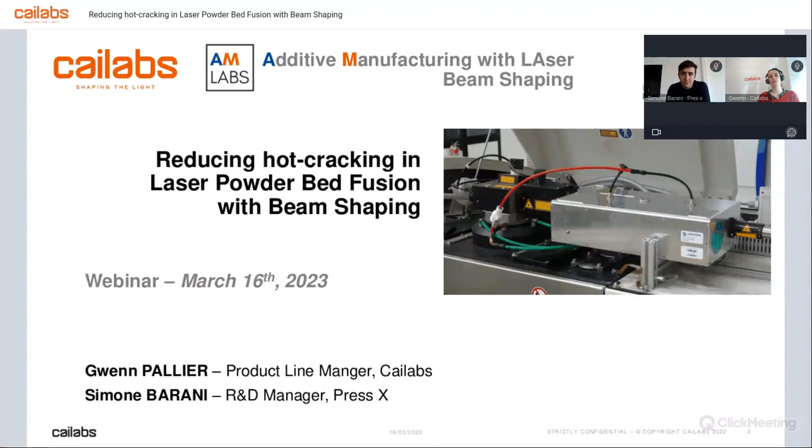So what is our agenda today? We will start by describing a bit what the AmLabs project was and what challenges we wanted to take up with that project. Then we will describe what Cailabs is doing and what solution we have provided on the project. Then Simone will present PressX and what they are doing, and what process results were obtained in Italy. And we will conclude and go to the Q&A session.

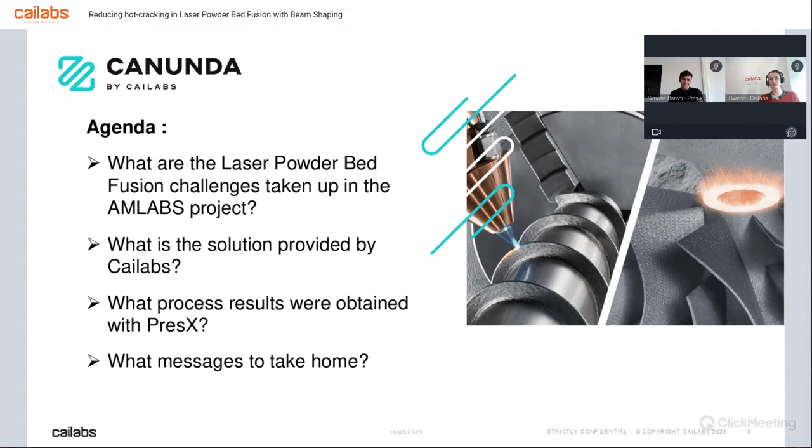I will try to make it pretty interactive with a lot of surveys, so on one side it's keeping you awake, and on the other side it's very good for us to know who we are talking to. So we will be looking at the challenges of laser powder bed fusion, and we will start with a survey.

If you give me a second, I will try to launch it. You should be having it on your screen, and you may have to scroll down to see the answers. You should be able to click on multiple answers. The idea is to give us insight on what, for you, is the one challenge or multiple challenges that you would like to address with beam shaping in laser powder bed fusion.

I'm going to give you about a minute to answer. My suggestion—I maybe should have taken another option—but what we've heard from the market is that there is interest in improving process speed, improving quality like hot cracking reduction, printing new powders which were a bit complex to print, increasing precision, and tuning the composition of the printed parts. This is also a topic we've been hearing about.

I think more than half of you have voted already, so I will give you some more seconds to answer, and then we will share the results. We'll give you five more seconds, and then we will be sharing the results.

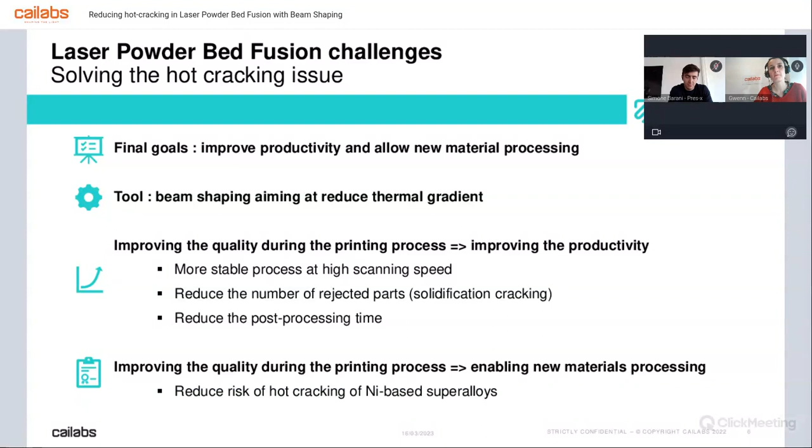Let's get back to the presentation and explain what we are doing in that project we were having with PresX. The idea is to improve productivity and allow new material processing in general. We were looking at using beam shaping to reduce the thermal gradient - that was the main idea of the shape we wanted to try, based on what we found in different papers published mainly by academics. So the idea is to have a more stable process enabling higher scanning speed, but also to reduce the number of rejected parts, with the ultimate goal to reduce post-processing time - Simone can give you better insight on that later. So the idea is to focus on one topic, because it would be too complicated to address all powders inside one project. We were looking at nickel-based superalloy powders and how to improve the processing of those powders.

A short word about this project - it was a Pulsate project with European funding. This project has just two partners: one technology provider and one technology adopter. Cailabs provided the technology, based on multiplane light conversion, and PresX adopted our technology and installed it in their workshop in Italy. The name of the project was AmLabs.

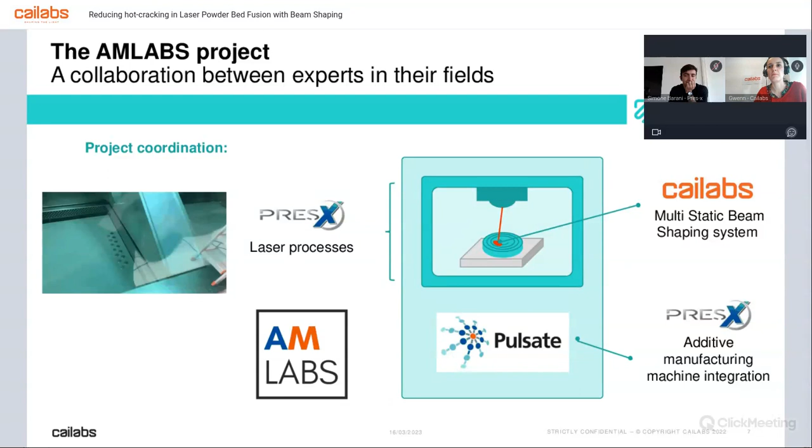I'll be asking a lot of questions again - if we want to see if what we were doing is relevant to you, I also want to know what you are using in your machine. So we'll go to survey number 2, which should be on your screen now: what laser are you using most of the time? It's a multiple choice, so I'd say you have to pick at least two answers - one on the power, one on the number of lasers - but you can pick more than that.

Since I know I have another survey following, I won't give you much more time - just one more minute to look at this. I'll be sharing the results now. It's pretty spread actually, but there are still people using 1 kilowatt lasers, as you can see. You may have to scroll down to look at the results - half of you are using less than 500 watts and half more than 500 watts.

Don't worry. So we are getting back to the presentation now, and I will be presenting shortly Cailabs and what we have actually provided inside this project.

So we do all the systems in Rennes, manufacturing and assembling. And then obviously we are a privately owned company, so we are trying to sell them as much as we can.

So what is Cailabs? I have to insist on one thing, which is that what we are doing is actually based on multiplane light conversion, a unique technology which was developed more than 10 years ago now by our CEO. I will describe the technology later on, but it's important to remember that everything we are doing is based on that technology. We try to apply that technology to a lot of different applications.

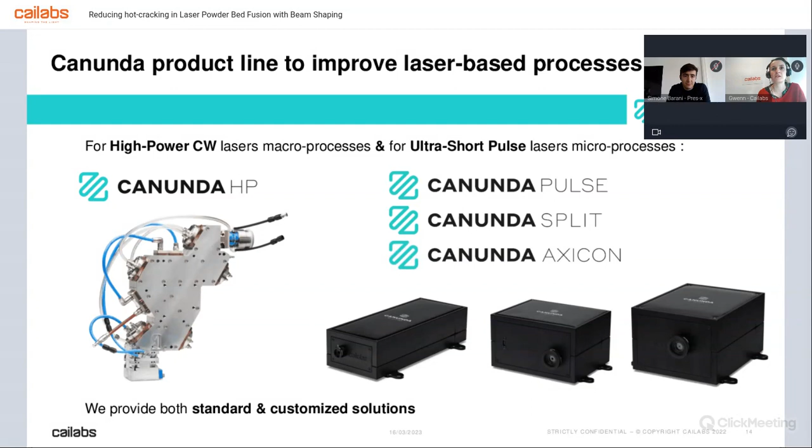So one day it's going to go from customized to standard solution. That's good news for you because it's going to be faster to get the system if you want one once it's an off-the-shelf product. But anyway, you can always customize it — it's kind of our DNA at Cailabs to customize systems.

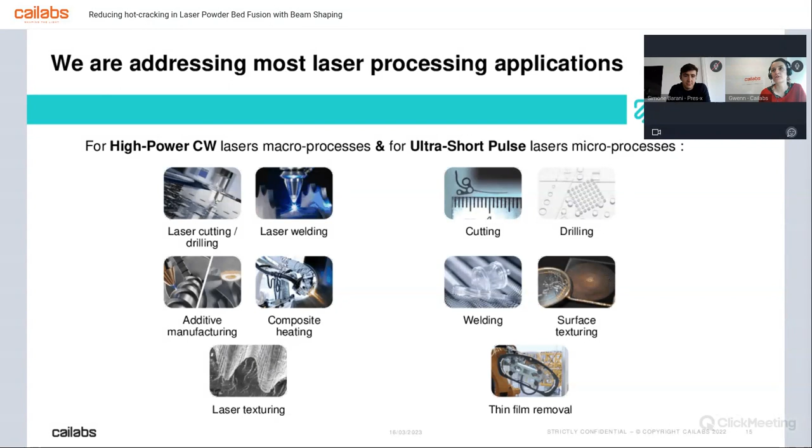We apply this system to a lot of different applications, and I'm pretty happy to say that we have demonstrated in each of these single applications that it can be useful to use beam shaping.

So that's the last time I'm asking you a question, but it's a very important one. Have you ever tried beam shaping to improve laser powder bed fusion processes? You have to give me 1 second to share the last survey. It should be now on your screen.

May I have to scroll down? Less choices — the first one is no. I'm pretty sure there's going to be a lot of no. And then you just have 2 options: either you have tried what is actually now being pretty...

...spread somehow in different R&D labs and application labs, which is beam shaping through the fiber of the laser, the most popular one being probably nLight. But there are people who actually tried other technologies too. I would say hopefully many of you have tried MPLC, but I don't know how many of you have. I'm not going to learn much on that. But there are other ways to do it than MPLC — you may have used DOEs. There have been some projects with DOEs.

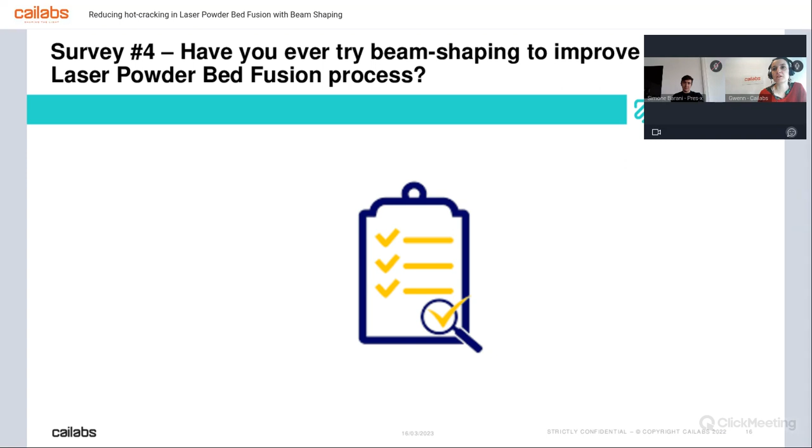I will just give a short word on the technology because, as I did say, there are many ways to do beam shaping. One is actually through the fiber of the laser, having what is generally called a dual core, or having just two cores, one inside core and one ring core. But there are also DOEs, SLM, a lot of interference-based systems. And if there's one thing I want you to remember on beam shaping technology, it's that if you use a different technology, you will get a different result. Just trust me on that.

Depending on how you are doing it, you may have exactly the same shape in the processing plane, because it's not that complicated to get the good shape in the good processing plane. What is actually complicated is to have it robust, to have it stable, to have it compatible with your environment. And one very important point that we are focused on a lot at Cailabs is how it's actually behaving, how it is one millimeter before, how it is one millimeter after. This is so important if you want industrial systems. So don't just look at how it looks in the processing plane. You have to really consider the whole beam and how it's propagating.

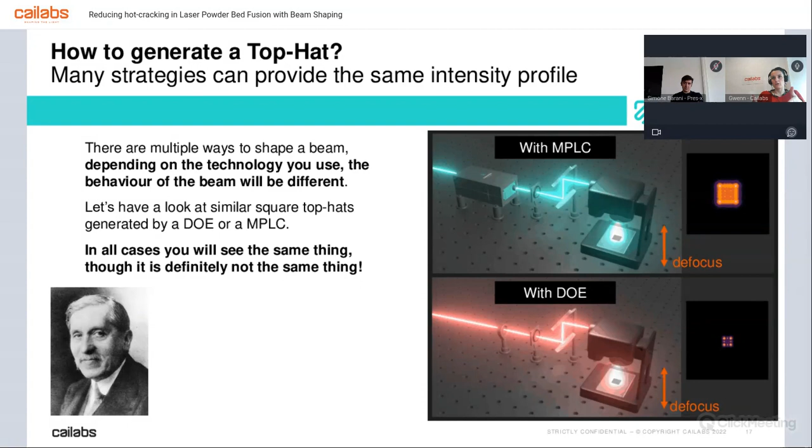So what you can see here is that it's actually fully passive, which is good to have something which is robust. It's fully reflective, which is also very good if you want to handle high power and high energy, and it's actually useful for a lot of things, like reducing focus shift, preserving the spectrum of your laser, things like that. You can actually shape multiple beams at the input. It can also be multiple beams at the output, and both can be either fibered or free space. So that's actually it for MPLC.

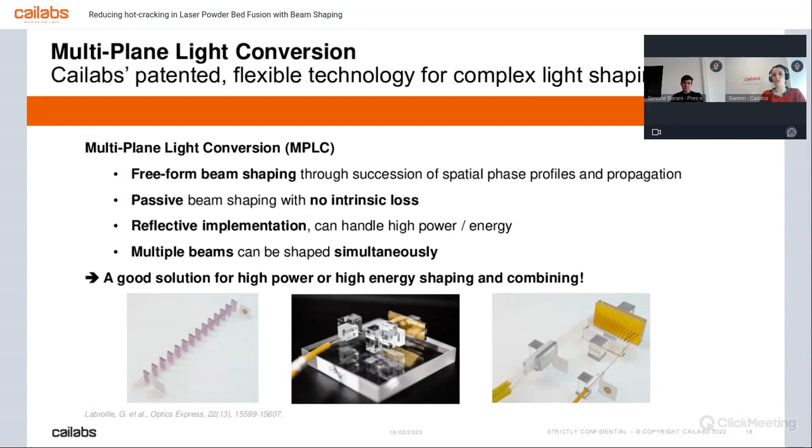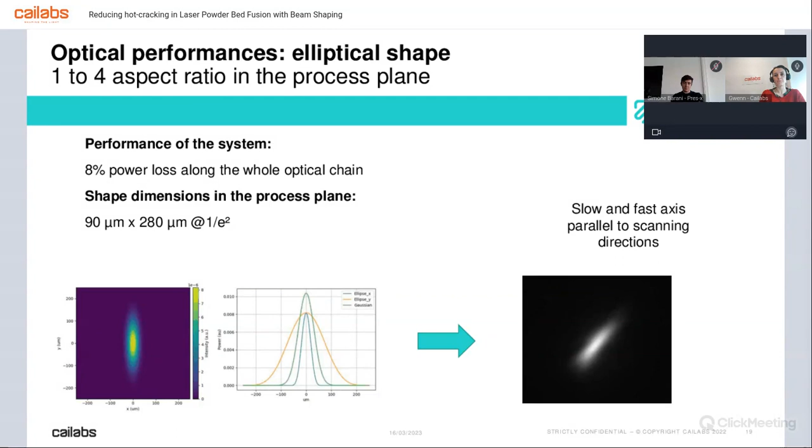I will be short on what we have done with PresX. So the idea was to test three different shapes. I did say it's based on literature. We looked at what was actually working, and we wanted to have that integrated inside a real machine and test on Inconel printing. So the first one was an elliptical shape, and the idea is that you manage the thermal gradient differently depending on the scanning direction. The second one is the classic ring, so in the end we were doing a ring of 150 micrometer diameter.

It's easier to say it now that the project is finished, but if I had to redo it, maybe I would make a little bit smaller ring, because we only had 200 watts. And I'm saying that because actually we could do it — we could do a smaller ring, we could do a bigger ring. That's one thing which is very important: somehow you have to adapt the shape to your laser power. And that's what Cailabs is capable of doing, which is also so important.

We are not stuck to one shape. We could do any kind of shape - a larger, thicker ring, larger ring, something in the middle, nothing in the middle. We could do anything. But we have tried that one, and it actually somehow worked at PresX. And the last one is the top hat.

So we were doing a 90 micron diameter top hat that was also installed on the system. The idea for now was we have one system which is providing one shape, and we were actually exchanging the optics inside that system to go from one shape to the other. That's what we were doing. It was our very first prototype in the project.

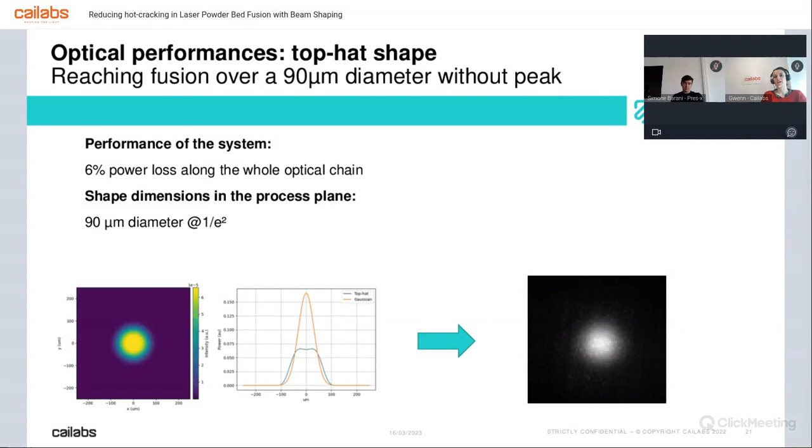What we will do in the future is different, but I will get back to that at the end of the presentation. It's now time that I stop speaking and I leave Simone to continue the presentation.

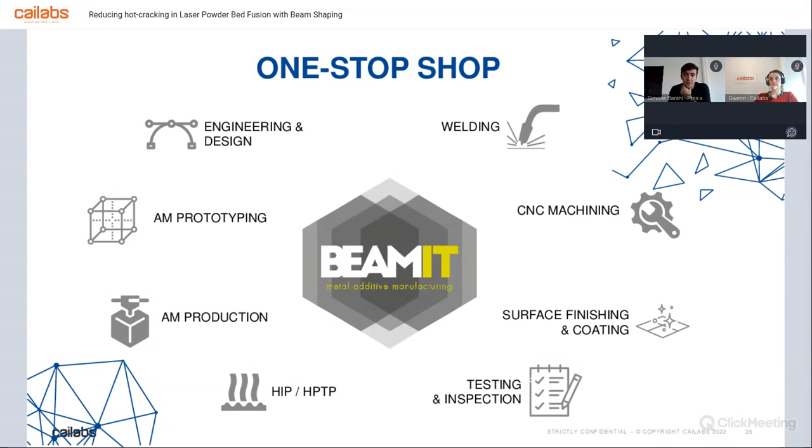So starting from the pre-manufacturing, then we have the AM prototyping and production. Following that, we have all the post-processing, where we have heat treatment - we also have hipping, welding, CNC machining, surface finishing and coating. And at the end, we also have testing and inspection.

Our printing capability is quite large. We have several choices of metal machines. In general, we are focused on laser powder bed fusion ones, but we also have two EBM Arcam. And also for the metal alloy choice, we have several.

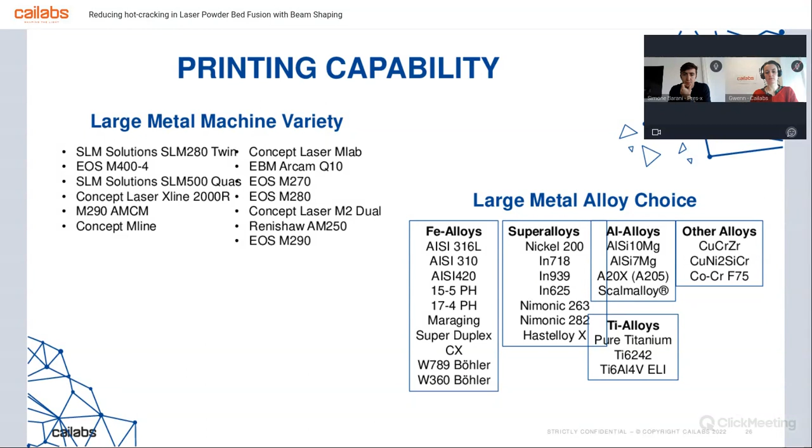Additive manufacturing is not famous for having such a large quantity of different materials that you can manufacture, in particular compared to more classic manufacturing processes. But depending on the plants, we almost cover all the alloys that you can see here. In particular for this project, the focus was, as Gwenn correctly said before, the Inconel 939.

Regarding the heat treatment, we have 3 vacuum furnaces in class 2 regarding the AMS 2750, and they are NADCAP accredited, and 1 air furnace that also allows oil quench.

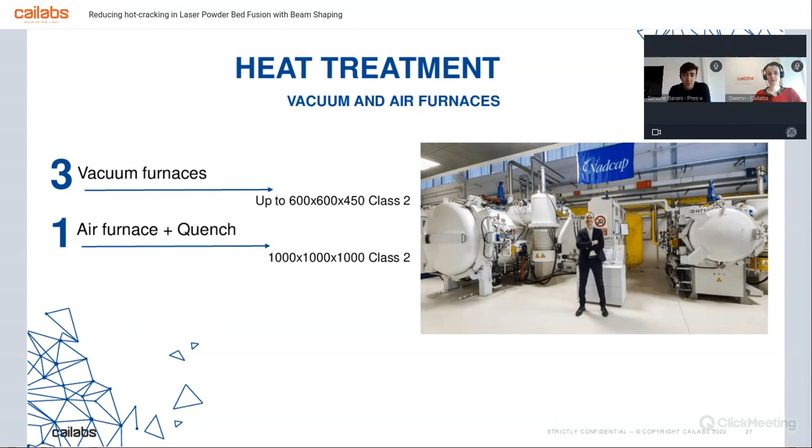Then following to the hipping. Hipping is a quite old technology that we use in general for casting of aluminum. But what we are trying to do is shape this kind of technology for a more actual use, that is additive manufacturing. In particular, we have installed the Quintus system with uniform rapid cooling that allows high pressure up to 2000 bar and 1400 degrees Celsius. But the very interesting thing is that the controlled cooling rate is up to 1500 degrees per minute. And all these features are in uniformity class 2 according to the AMS standard again.

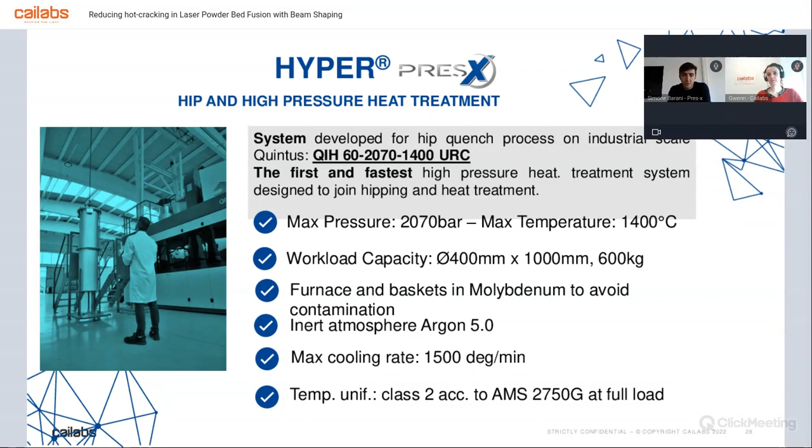Then we offer different solutions regarding surface finishing, starting from the more classic ones such as blasting or manual, to more complex ones such as chemical milling or vibro finishing, reaching to the super finishing process of DryLyte. That is a technology developed by GPAInnova in Spain, but we are a developer of the technology, and we also sell the machine. This is a solid solution, electrochemical solid solution, for finishing that allows reaching super finishing at the end of the process.

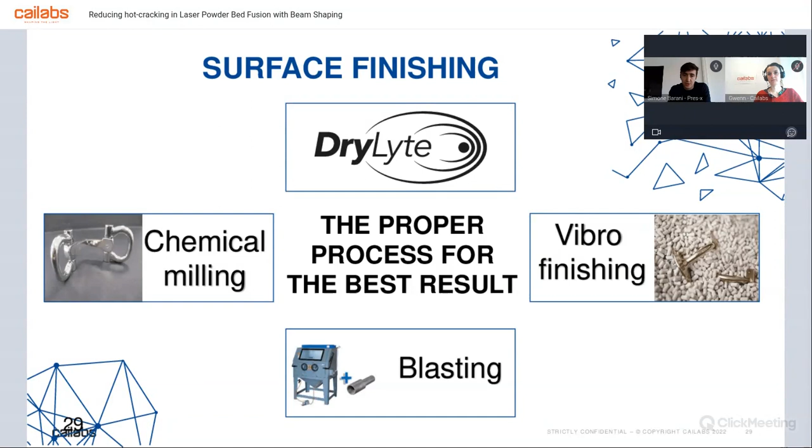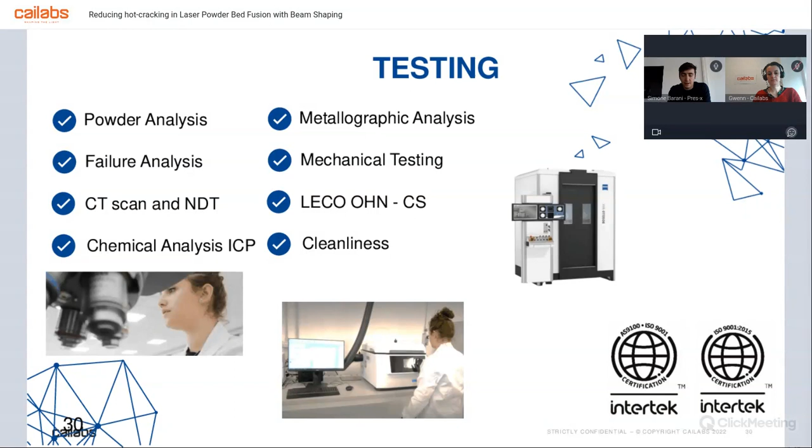Concluding, we have the laboratory that at the beginning was born to be part of the additive manufacturing process. So we are focused on powder, and in particular powder analysis such as granulometric, physical, or chemical analysis. We are now moving to a more complete laboratory testing, adding mechanical testing, metallographic analysis, failure analysis, CT and NDT, and also cleanliness. This was just a short presentation of our group.

Now we can go to the results of this project. For this project, we installed the Beam Shaper developed by Cailabs in one EOS M280 machine. That is a quite old machine compared to all the others that we have, and also in general regarding printing machines. But the idea is to try to understand if we can print a material like Inconel 939 on an old machine.

We currently print Inconel 939 on machines that have a different amount of power. For the EOS M280, the maximum power is 200 watts, and it's a single laser machine. In this slide, you can see on the left the EOS M280 open, and the system, the beam shaper, is installed. In order to have the laser, we have the laser source directly connected to the beam shaper, and then it goes to the laser scanner.

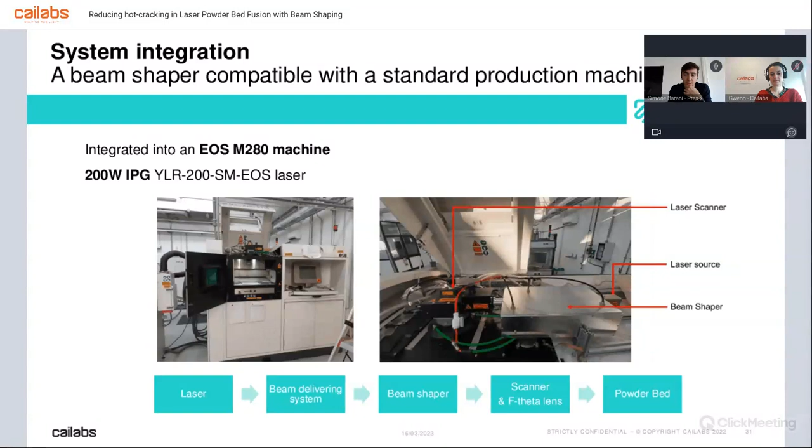We have installed 3 different beam shapers, and we have explored the properties of the material. In particular, the quality evaluation was focused on 2 parameters: porosity and the presence of cracks. The printing process is quite a fragile system. In general, you have 4 different parameters that you can tune: laser power, scan speed, hatch distance, and layer thickness.

If you're not so comfortable with the additive manufacturing process, I will introduce these briefly. Laser power and scan speed is basically the power of the laser and the velocity at which the laser scan moves. Then you have hatch distance, which is the distance between 2 parallel passes of the laser. And layer thickness is the quantity of powder that you're putting down at every step to create your part.

For all 3 different beam shapers that we tested, we performed some specimens on the base plate in order to evaluate the presence of porosity and cracks. Unfortunately, for the elliptical one, the result was not good. We did not find a set of parameters that allowed us to produce a part with low porosity and no cracks. So you will not see the results of this shaper in this presentation, because basically the result was not good.

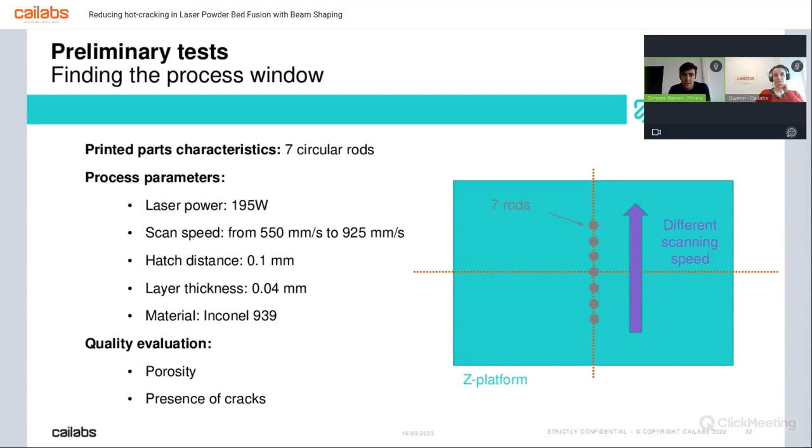So we go directly to the ring shaper we installed, and we tuned just the scan speed. The reason is that, as I said, it's a quite fragile equilibrium in order to obtain a high quality component in a relatively short amount of time. One of the biggest problems of the additive manufacturing process, in particular powder bed fusion, is the lead time of production. The production of a part can take up to several days just to be printed, and then you have all the post-processing. This increases costs, in particular in times like now, where electricity and everything else is quite high priced.

We were not able to change the layer thickness, basically because layer thickness is due to the movement of the base plate before the recoater passes. So you cannot print several specimens with different layer thickness, basically because it's just the movement of the base plate, and so it's uniform for the whole base plate. Hatch distance also enters into the geometric parameters of the printing, so we went ahead with the hatch distance fixed. You can change hatch distance depending on the specimen, but it's more of a geometric characteristic.

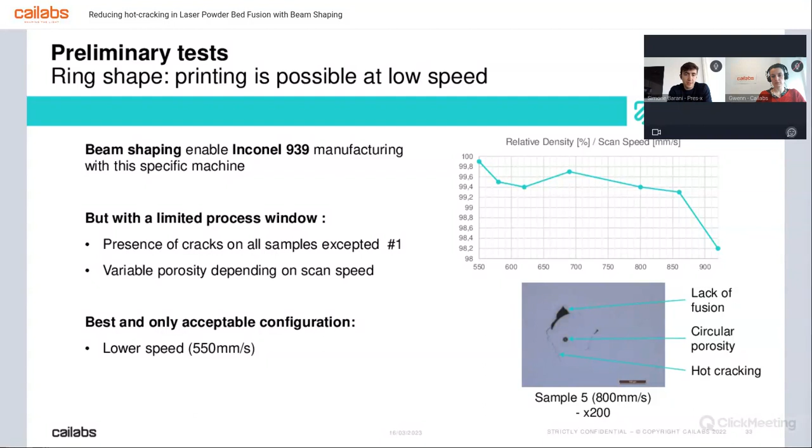The only result that was really good was at the lowest scan speed, that was 550 millimeters per second, where we reached a density of 99.9% and no presence of hot cracking.

Following the ring shaper, we go to the top hat, where we have way more good results. In particular, we have tried with the same parameters as for the ring shaper, and we have tried different scan speeds.

This time we have observed no cracks in any sample for any different scan speed and very low porosity, that is just circular. That, let me say, is the least dangerous defect for additive manufacturing, because you are not introducing any edges that can increase the stress concentration. So in particular, the lowest one was 99.7% density of the material.

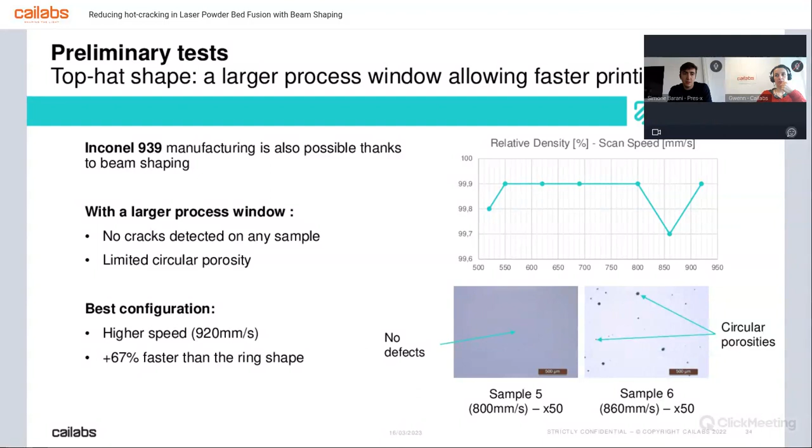So starting from this preliminary job for both shapers, we wanted to observe if the laser beam shaper would also introduce uniformity across the whole base plate. So what we performed was to print several specimens around the base plate with the best parameters that we found in the first approach, and see how the mechanical properties change and how the repeatability of no cracks and high density is obtained.

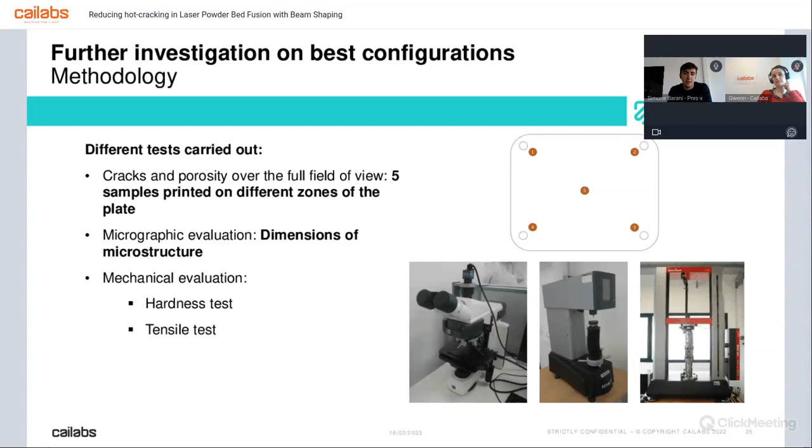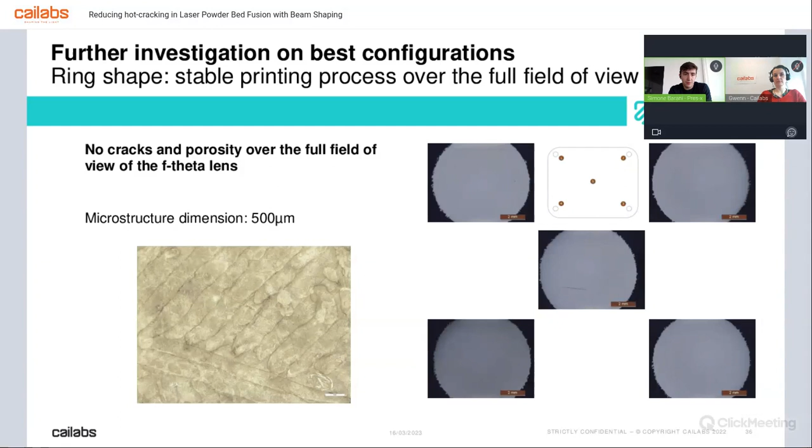For the top hat, we chose the higher scan speed velocity that we found with a higher density, so 920 millimeters per second. And we have seen again the repeatability of the application of a beam shaper on a laser powder bed fusion machine, because again, we have no cracks and no porosity at all on all the specimens around the base plate.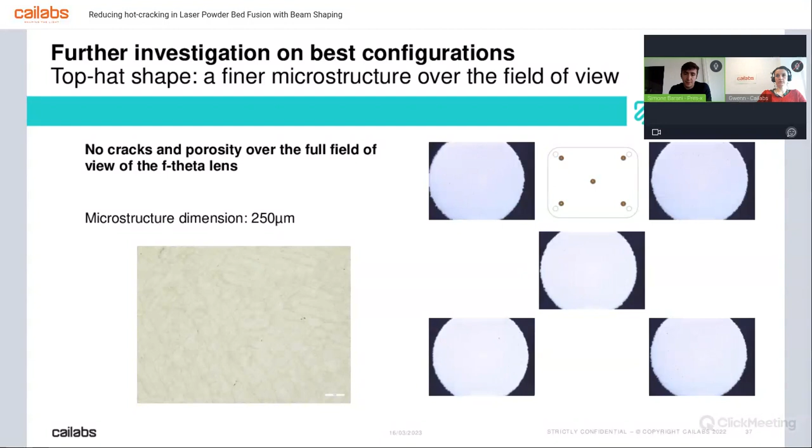This time, the laser spot is half of the one of the ring shape.

And then we also performed some mechanical testing, in particular tensile testing, in both directions of additive manufacturing. Again, since you are building layer by layer, you have a kind of anisotropy in the sample, and so in general what you test is both directions, which is the reason why we tested in X, Y, and Z direction.

And then we have compared the result that we have obtained with the expected one. The expected result is what we have observed printed in Inconel 939 on a newer machine that we have inside. In general, what we have observed is a decrease in mechanical properties of roughly 100 megapascals, which is not that much considering that this part needs to be heat treated at the end.

But this decrease in mechanical properties correlated to the fact that we have no hot cracking, and correlated to a small laser spot, will let us arrive to the consideration that what we have done to the system is give an energy that is lower to the point. So we have formed a less quantity of gamma prime phases in this manufacturing production, which have a lower strengthening effect on the material, and so we have reached slightly lower mechanical properties, but also no hot cracking.

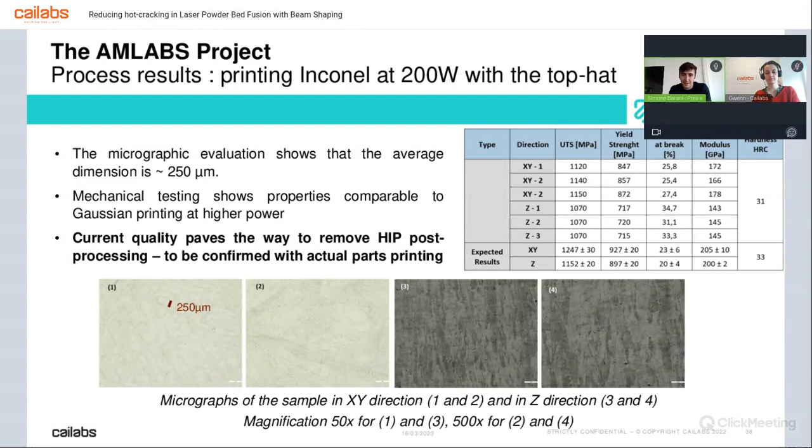Considering that this part is generally heat treated at the end, it's something that's perfectly fine, and it's a very good result, because we have printed it.

After that, what we have done is print another job, which you will see in the next slide, with a small part to see if we have some cracks, and we don't have any cracks. So at the end, the result will be that without beam shaping, we have cracks and we have porosity.

This consideration is valid both for the machine that we have used for printing in this project, the EOS M280, but it's also valid for what we print with a newer machine, for example the M290. In general, we observe cracks, and following that, we perform hipping, for example, to remove that.

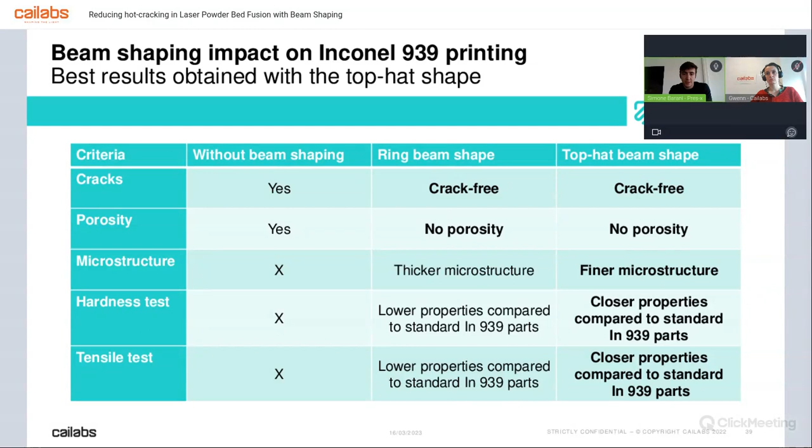Instead, we have crack-free results both for top hat and ring beam. And then we have porosity without the beam shaping, but here we have no porosity. We have a finer microstructure in the top hat, leading to the consideration that we have probably generated less structure that would introduce fragile effects. And the mechanical properties are closer to the ones that we obtain with the newer machine, but with cracks.

This is, as I told you before, the validation job. Unfortunately, we were not able to print a fully complete part, basically because it requires several days, and this was a short project. So if we have some troubles with the printing, then we need to start again, and this will introduce delays, and we will probably run out of time. So this was just a part, but the idea that we have printed a part that is completely crack-free, that is completely full dense, in Inconel 939 with an old machine, is a really nice result.

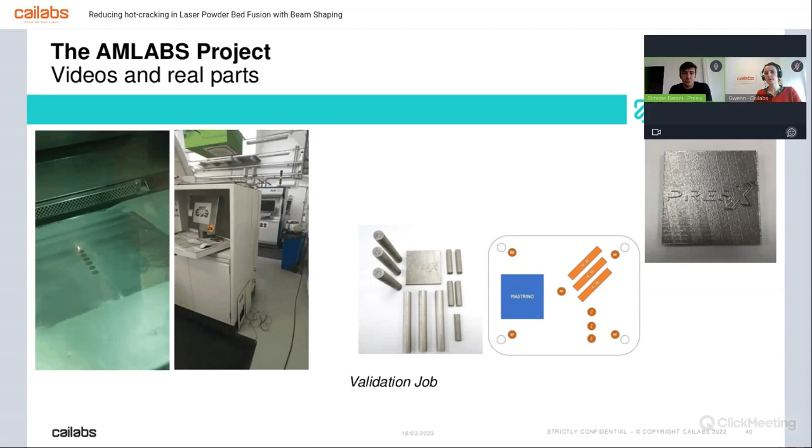And again, I take the microphone. Give the microphone to Gwen again, and thank you for the attention.

Thank you, Simone, for this very nice presentation. I'm so happy you are actually with us, because I would definitely not be able to give so many details about what was actually done. So is my mic working well? Clementine, can you tell me? Yeah, should be. Okay, perfect.

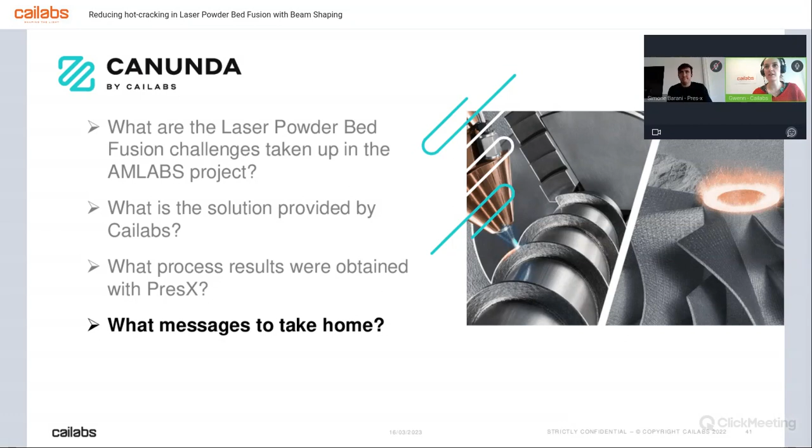So we are actually reaching the conclusion, so it's actually perfect timing, the conclusion of the project AMLabs.

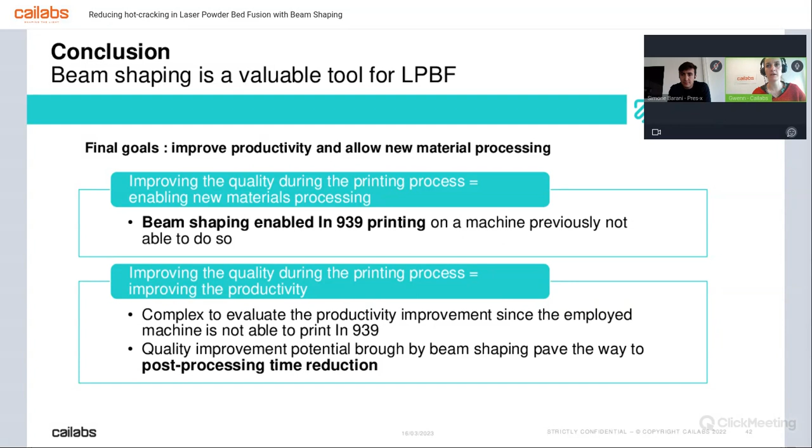Well, I think we are happy that we have somehow demonstrated that beam shaping was working to print Inconel 939, and that it can actually improve the quality of the printing process. We are actually paving the way for post-processing reduction or suppression. We didn't demonstrate it, this is still something which has to be done, but we have actually confidence that it is working. As Simone was saying, this project had to have an end. We have limited budget, so we couldn't demonstrate that, but we will be doing that soon.

So what are the next steps then? Well, actually, the idea is that we have demonstrated that we could do retrofit of existing machines to increase the list of printable materials with one machine, which is maybe not capable of printing that one material. We could actually integrate that also in new machines as well, of course. We want to carry on development with PresX. Now that we have enjoyed going to Italy and working with you, we hope that it's going to continue, and we will actually be studying, I hope, more complex parts, like real parts.

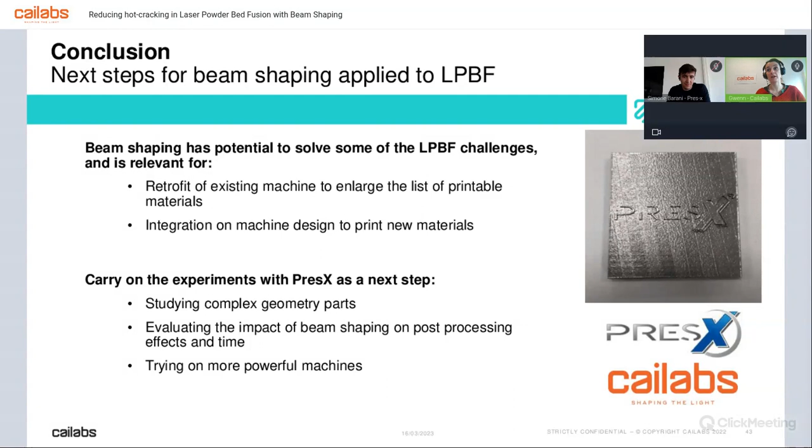Actually, that would be pretty nice. And we have to evaluate what is the impact on the post-processing. So that's something I hope we will be doing also in the future.

I want also to say one word about the future of beam shaping for LPBF, I would say in general at Cailabs. So I will be talking a bit on more short term and somehow on more long term.

In the short term, we have learned so much inside this project. It's been really a very important project for us. And now we have a better view on what has to be done on the LPBF, and what we plan to do in the next few months, and I'm really saying in the next few months because it's going to come very soon, is actually to have systems focused on two topics.

We will be looking, of course, at yield improvement because it's a huge challenge of the LPBF world. What we believe is actually working for that is to have some kind of ring shape that enables faster printing of the inner of the parts. You have a larger ring compared to the Gaussian beam, and you go faster because you increase the hatch during your printing. Then you have to switch back to a small Gaussian. That's what somehow we feel will be working fine to do the contouring.

So right now we are working on having that really fast. The target is 10 milliseconds for the switch in between both shapes.

And in parallel of that, we will be actually looking at hot cracking reduction because this is what we demonstrated inside that project, and this is probably working better with top hat. So we want to generate a top hat, and we also want to be able to switch back to Gaussian. Why that? Well, there will be parts that you want to do with the Gaussian just because your customer validated the process with the Gaussian. So you have to get back to the Gaussian as well.